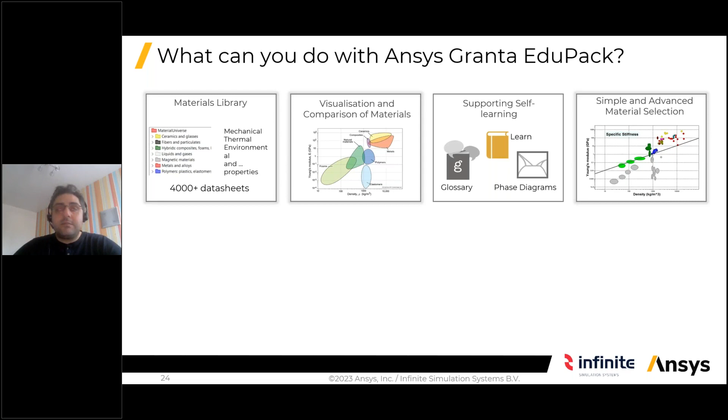For example, we have a Learn Online section within EduPack, which enables students to learn a bit more about materials, material selection, and different attributes of materials. It helps academics to teach material selection quite easily and smoothly to their students, as we will see. And there are tools in the software which help students understand the economic side of materials, if they need to take that into consideration when selecting a material for an application.

As mentioned, the Synthesizer tool helps them estimate properties of hybrid structures, and the interactive tools in the MS&E database help them understand the relationship between processes, structure, properties, and performance of materials. And finally, the Eco Audit tool enables them to take into account the environmental impact of their material selection choices.

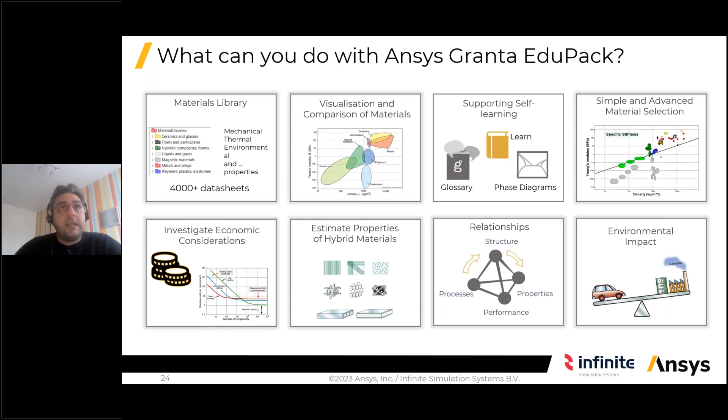To go further on the sustainability side of things, we are all aware that going forward, it is more and more important to teach students about life cycle thinking in everything in engineering, but more specifically in materials science and engineering, and to think about eco-design, because of the global warming challenge that we are all facing.

And when we talk about life cycle thinking for materials, we are thinking of the cycle on the left-hand side of the screen, where students need to be conscious of where the materials are extracted from and how that is done in the material production phase. Then the materials are sent to product manufacture, where a product is manufactured from them, and then the product is used in a specific country for a specific amount of time. Is it part of a car, a moving vehicle which needs fuel, or is it going to be stationary?

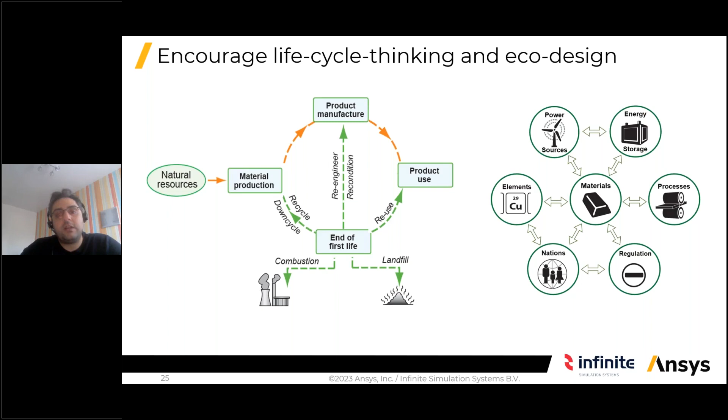And then by the end of its life, what are we going to do with that product? Are we going to recycle it? Can we recycle it? Do we need to downcycle it, or do we have no choice but to put it in the landfill? Keeping all of that in mind when selecting materials for specific applications helps students take environmental impact into account as well. And we have dedicated databases, data tables and tools in EduPack that help students learn more about this life cycle thinking.

Specifically, we have level 2 and level 3 sustainability databases available in the software. The elements data table is available in both databases, which enables students to explore compositions of materials, as well as show their geo-economic and criticality aspects. So you'll be able to see, for a specific material, that an element is being essentially sourced from a specific country, how much of that material is available worldwide, and if there are any issues in that country.

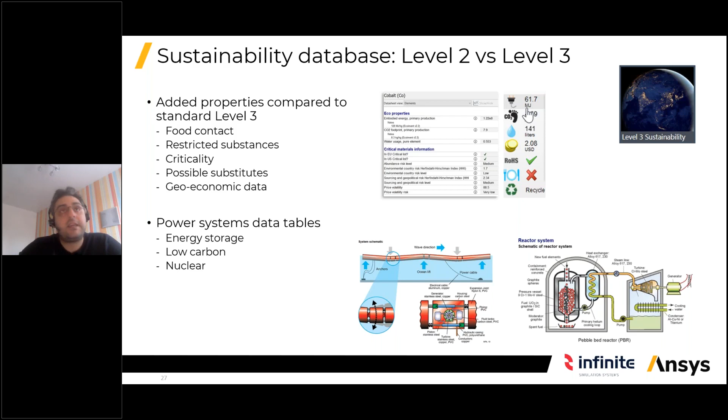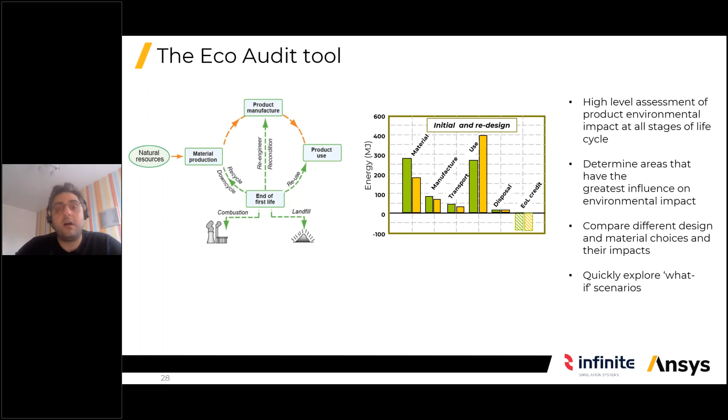A few words about the eco-audit tool, and then we'll jump into the software. So the eco-audit tool is one of the most popular tools available in the software. It directly allows students to explore exactly this life cycle of products. So it provides a high-level assessment of product environmental impact in different stages of its life. Students would also be able to determine if there are any dominant areas that are having the biggest impact on the environment, and they would be able to explore alternative or what-if scenarios to see if they change a material or a manufacturing process or something within the use phase of the life of the product, how that would change the environmental impact, namely the energy requirements and the CO2 footprint of that product. So I'll show that in the live demonstration.

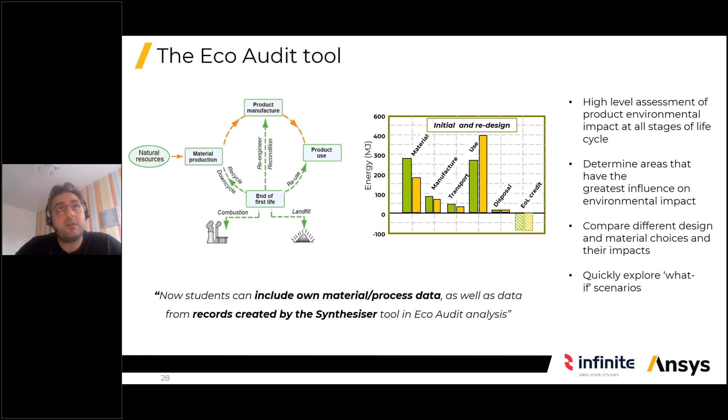One of the good news is that from last year, we have kept increasing how academics and students would be able to customize the way that they work with eco-audit. So previously, students were only able to bring in the materials that were available in the software as part of this environmental assessment, this streamlined life cycle analysis that can be done with the software. But from last year, students and academics can use their in-house data. So if there's a material that is not available in the software, students can create a data sheet within the software and use it within the eco-audit tool as well. And so, of course, that's very helpful to explore specific materials and manufacturing processes that you're teaching within your classroom that may not be available in the software.

Okay, with that said, let's jump into Ansys Granta EduPack and showcase some of the things that we have talked about up until now. So these are the different databases that are available in the home screen of the EduPack software to choose from. We have the introductory, level 1 and level 2 databases on the left-hand side, and the level 3 advanced databases are available to choose from on the right-hand side of the screen. So for the demonstration purpose of today, I'm going to choose to look into the level 2 sustainability database. So let's click on that. So here we have the home screen of the level 2 sustainability database.

On the left-hand side, we have the different data tables available. So for exploring different material data sheets, we have the material universe data table. If students are interested in different manufacturing processes, we have the process universe data table. References include the different sources of data that we have used to gather and agglomerate this data. Producers provide information about producers and suppliers of these materials. The elements database, as mentioned, provides information on different elements on the periodic table. And we talked about nations of the world and legislation and regulation data tables as well. Let me click on that.

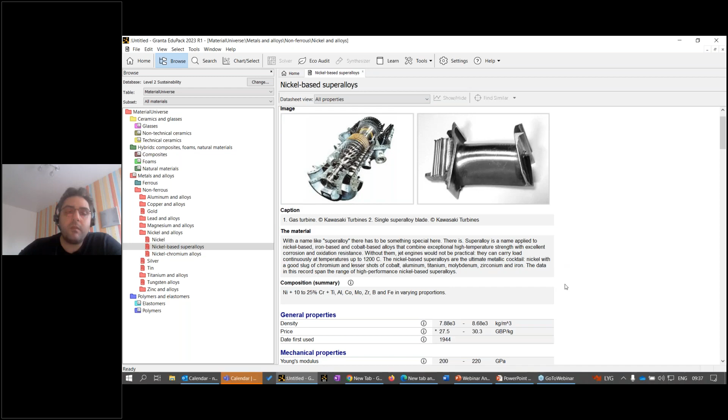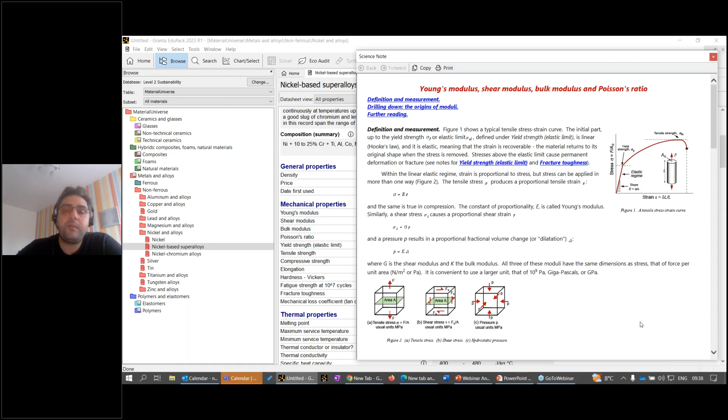Here we have price and density of this material available, mechanical properties including Young's modulus, yield strength, and Poisson ratio. If students are interested in finding information about any of these material attributes and aren't familiar with them, they can simply click on the information icon next to each attribute, and a science note pops up, which includes comprehensive information about, in this case, Young's modulus, the background of the attribute, and how it can be calculated or measured, along with any other material attributes associated with it.

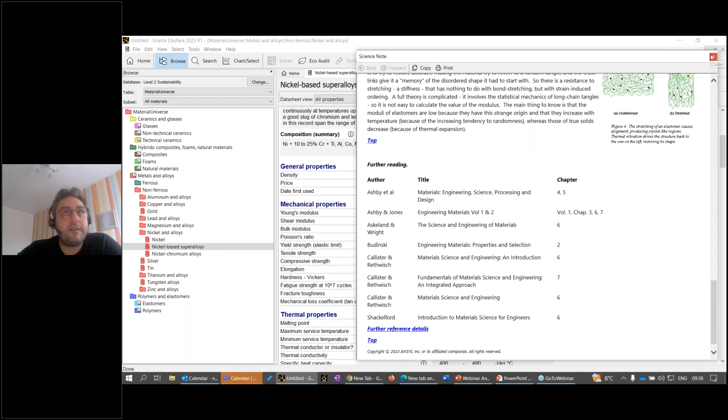At the bottom of the science note, we have a list of further reading so students wanting to dive a bit deeper into this material attribute can go into any of these textbooks and find that information. So I would say pretty good self-learning tool for students to familiarize themselves with each of these material attributes. Moving further down, we have information on the thermal properties, including melting point, specific heat capacity, thermal conductivity, and information on electrical and optical properties of the material.

Criticality of the material is explored, so whether the material would have supply chain issues at the moment or in the near future is covered. Also, how well the material can be processed and how well it can withstand different environments, including water solutions, acids, alkalis, oils, alcohols, and so on.

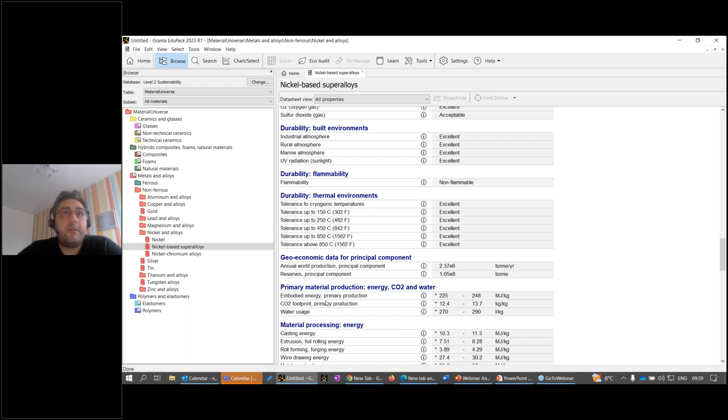We also have information about the environmental attributes, for example embodied energy and CO2 footprints of the primary production of the material, as well as those same attributes for different processings of the material. At the bottom, we have the end-of-life attributes, which include information about whether a material can be recycled or not, and if it can, what the environmental impact of that recyclability would be.

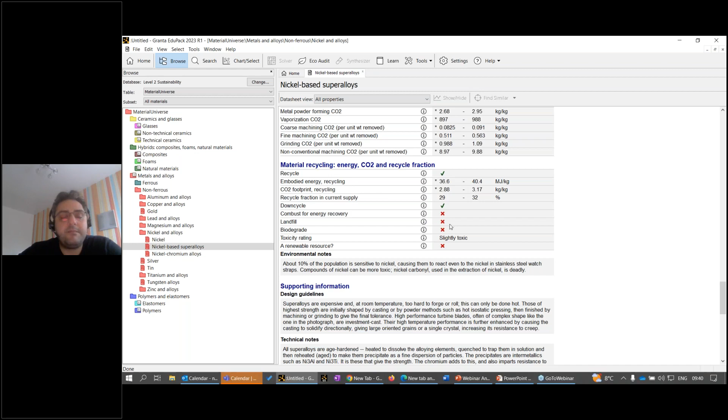We have environmental notes, design guidelines, technical notes, and typical uses of this material available. We also have, in level 2 databases, if relevant, the corner or part of the phase diagram that is relevant to that material mentioned here.

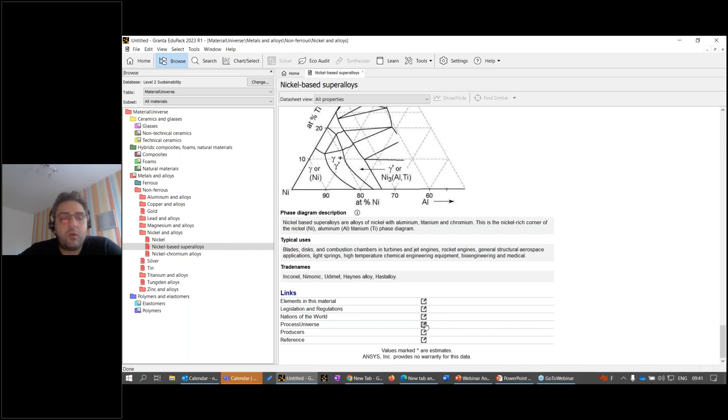So at the bottom of the page, after talking about typical uses and trade names of this material, we have links that would take students to other parts of the database that has information relevant to this specific material. For example, if we go to the link for Process Universe, we can see all the different processes that are compatible for joining, shaping, and surface treating this material.

For example, if we go into casting and investment casting, you'd be able to see that we have a dedicated data sheet for this specific manufacturing process, which, similar to the material data sheet, I'm not going to go through.

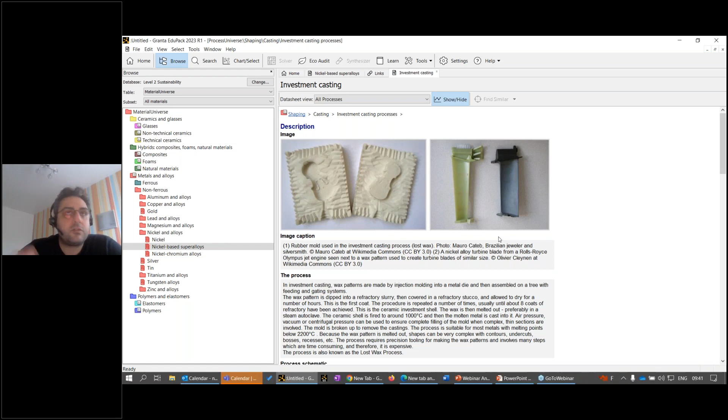It has information about the description, schematic of the process, and what shapes and materials would be compatible with the process, and so on.

In the interest of time, let's move on to the chart select functionality, because search is straightforward. Students can search for a term and the software will bring up relevant data sheets for that term.

But chart select is the functionality that enables students to create visual charts and run material selection projects. In this demo, I'm going to focus on creating a visual chart. If you're interested, we can explore material selection in the Q&A or separately after the webinar.

In order to create visual charts, which help students compare materials and categories of materials in terms of different material attributes, students can simply go into the chart select functionality. We are directly in a selection project, and we can click on chart index. The software asks us to populate the Y and the X axis.

Continuing on the sustainability side of things, I'm going to populate the Y axis with the energy requirements, so let's go to primary material production and embodied energy of primary production. I'll have that attribute on the Y axis, and on the X axis, I'll have CO2 footprint of primary production. So there you go.

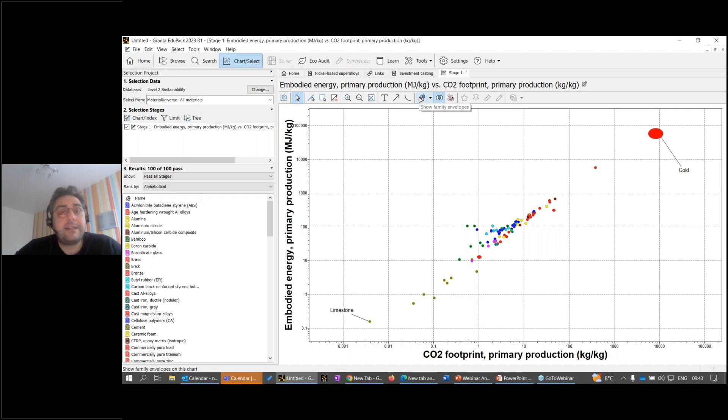Let's click on show family envelopes, and here we can see metals and alloys, composites, natural materials, non-technical ceramics, glasses, polymers, and so on. Students would be able to easily, visually, and interactively compare materials in terms of their attributes.

This would enable them to move forward. For example, if they are trying to select a material for a specific application, this could be a good starting point. So, very briefly, that's how to create a chart and the typical structure of material and process data sheets.

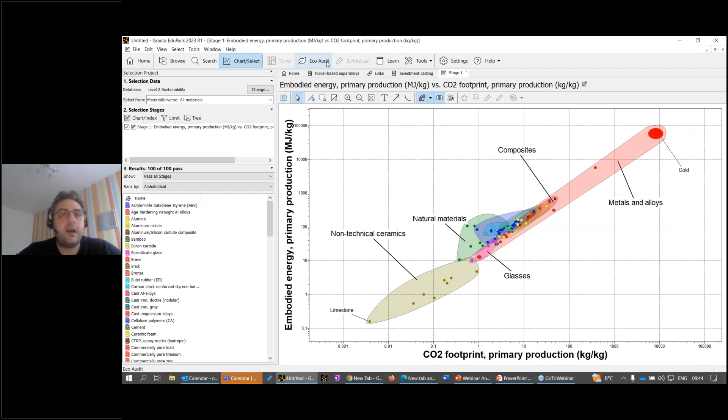But the other thing I wanted to showcase today was the Eco Audit tool. Very quickly on that, if we click on the tool, in the interest of time, I'm going to open up one of the samples provided to students as part of the software.

Let's look into a product, for example, the bottle PET product. As you can see, what students can do is, for a specific product, fill in the bill of materials for that product. So different components—in this case, the bottle, cap, and water—are separate components.

Students would be able to select the materials they have in mind or that are on the market for these specific components. For example, for the bottle, we are using the PET polymer material. They can choose whether it's a virgin material, a reused part, or identify a percentage that is recycled—for example, 50% of the PET polymer used for this component sourced from recycled sources.

They also need to identify the mass of that component and how it is manufactured, choosing from different manufacturing processes. As I mentioned before, they can add a custom process—so if the manufacturing process isn't available in the drop-down menu, they can add their own if they have the information about the environmental attribute of that process.

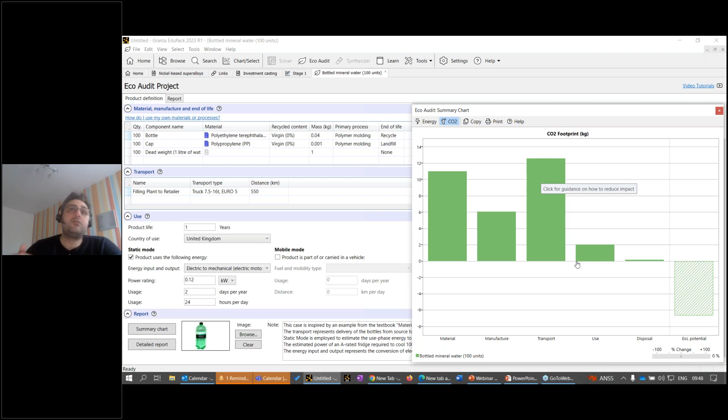They would also be able to explore what-if scenarios. So for example, if I go to the top and select compare with, copy of current product, I can change a specific material or manufacturing process or any of the other inputs here, and I can see live how this would change the environmental impact.

So for example, if I change the polymer to glass - let's go with soda lime glass. And of course I need to change the mass of it as well, because glass is much heavier than the polymer, so let's go with 200 grams. I also need to identify the primary process, so let's go with glass molding.

And of course, more material is being used here, that has an effect as well. On the manufacturing side, again glass has more environmental impact, similar to the transport phase, again because it's heavier. Use case is similar. Disposal, again, glass is not as environmentally friendly as PET.

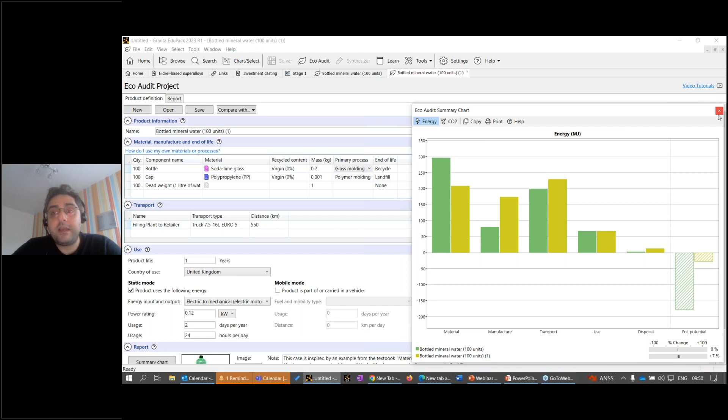So students would be able to immediately see how changing a specific parameter in the life cycle analysis they're running would change the environmental impact of the product. And so, hopefully this would inform them and inform their decision-making process as well.

All right, let's go back to the slides and finish up quickly by going through some of the updates that have happened in the recent years. So in 2021, we added some data and tools available in the software.

Which allows students to explore battery cells and different attributes of different types of battery cells, and they will also be able to use the battery designer tool to combine different battery cells into a battery module and then a battery pack, and see how the performance of that modular pack would be different if the settings they're using to create it change.

We've also done a complete refresh of the built environment database. So if architecture and civil engineering is of interest to you, we have a lot of new images and updated information on the material attributes there.

From 2022, students are able to create their own category of material bubbles. So you can see here, each material family is being shown to have an envelope, and I showed that in the software. Custom material bubbles can now be created, and that can help in specific projects you might be introducing your students to - they can create their own specific categories of materials relevant to the course.

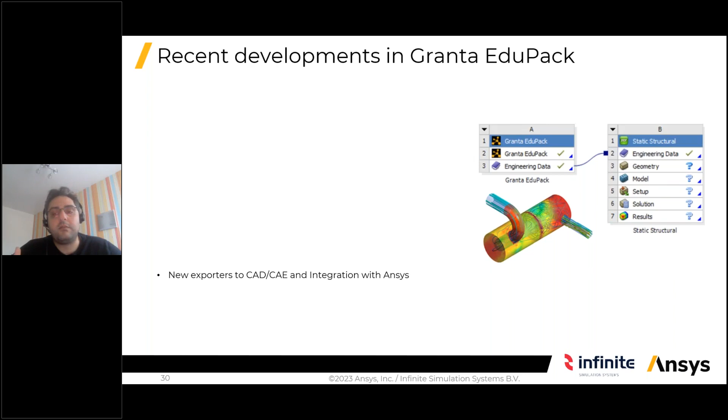As mentioned, from 2022, students can use their in-house data on materials and processes within the Eco-Audit tool, and we regularly add exporters to EduPack that would enable students to use this data within CAD and CAE software if they're running simulation. This is not just Ansys - there are other software, Abaqus, SolidWorks, MATLAB, all of them have their own dedicated exporters available in the software.

Specifically this year, we have integrated the medical devices database that was a standalone database into bioengineering, to streamline teaching of these types of courses.

Students can create and use their own secondary manufacturing processes within their Eco-Audit tool, making the tool even more customizable. And the whole of the sustainability attributes available in the software have been updated, so it is completely updated information available in the software in that regard.

Very briefly on the teaching resources that are available for the academics when you do have access to the software.

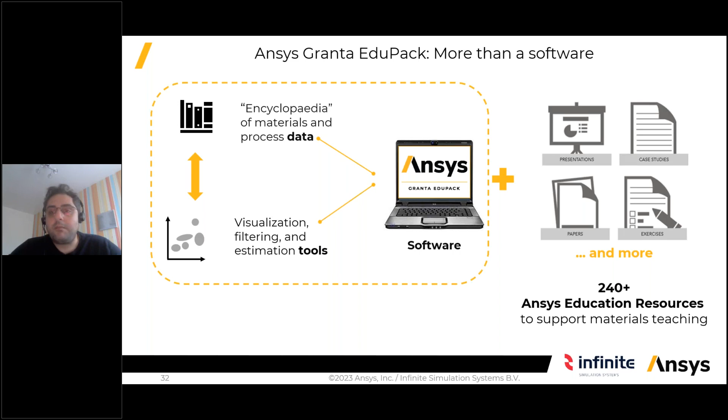These are, as I mentioned, teaching resources that would help you implement this usage of the software immediately in your classroom. They include lecture units, case studies, exercises, micro projects, white papers. There are more than 240 of them. And I've included the link here, which you can use to go into the Ansys Education Resources website. I would say more than 80% of them are open use, so you can use them without any permission required.

Some of them are reserved for educators that have licenses of EduPack, because we typically don't want students to have access to them because they have answers to questions. So there are, for example, sets of exercises with answers, which academics regularly use for creating assignments and exams. So we don't want students to have access to those answers.

These are some examples of the case studies and micro projects that are available in the website, specifically for materials science and engineering, mechanical applications, bioengineering, sustainability, and so on. Ansys has what is called innovation courses. These are free courses on our website, which we have for different physics that Ansys has tools in.

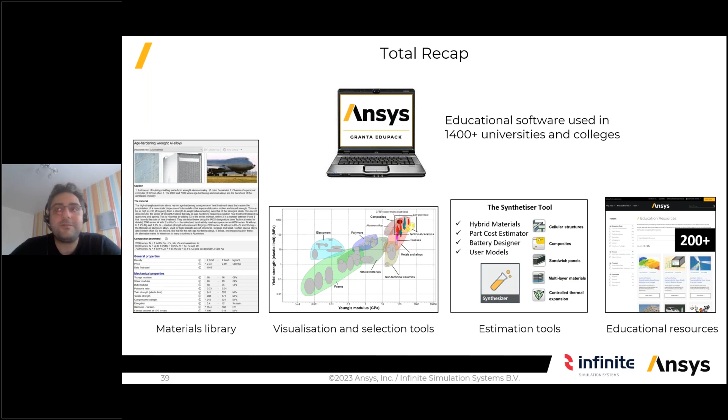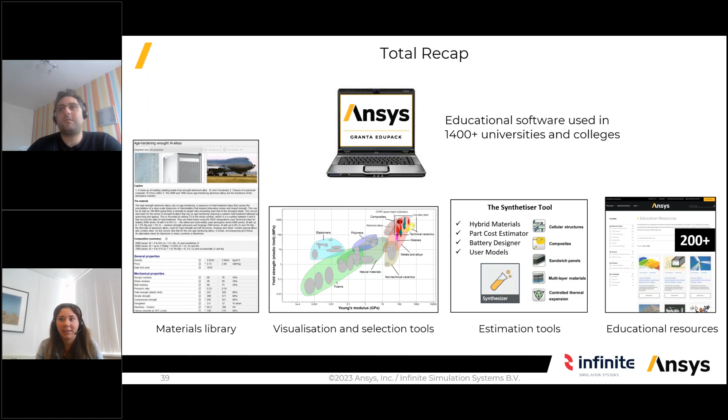Okay, so I'm gonna hand over to Sarah. I'm sorry, I think we are running a little bit over time as well, Sarah. So maybe we can just do the recap and go straight to the questions. Yeah, of course. I hope this was very helpful for you to learn more about what EduPack has to offer. Naveed, you can go to the next slide, and maybe the slide after that as well. Should I go to the next one? Yeah. There you go. Thank you.